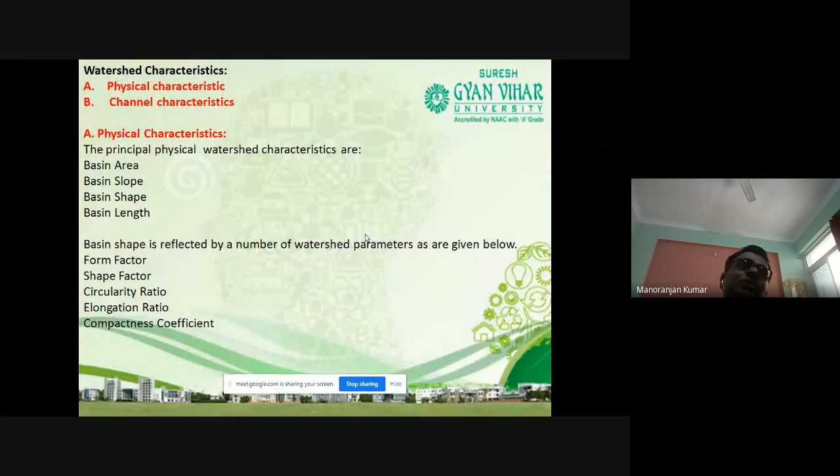Now, first we are going to discuss the physical characteristics of the watershed in detail. Physical characteristics means the area of the basin, length of the basin, slope of the basin, and shape of the basin. Watershed geomorphology refers to the physical characteristics of the watershed. Geo means earth, and morphology means the outer construction of the area. So watershed geomorphology refers to the physical characteristics of the watershed: basin area, basin length, basin slope, and basin shape.

So what is the importance of these physical characteristics? Why do we study them? These physical characteristics affect the runoff, and runoff is the most important thing in the watershed. So they affect the runoff and other hydrological processes. Let us see what those physical characteristics are. The first physical characteristic is the basin area. The watershed area is also known as the drainage area, and it is the most important watershed characteristic for hydrological analysis.

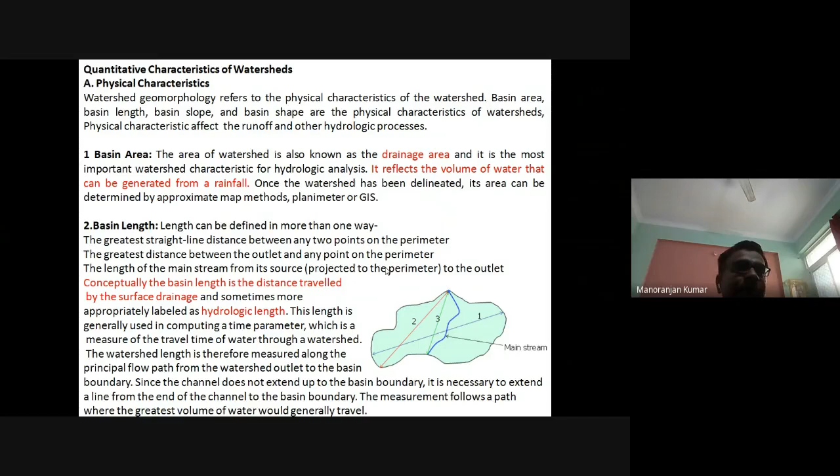Since the channel doesn't extend up to the basin boundary, it is necessary to extend a line from the end of the channel to the basin boundary. The measurement follows a path where the greatest volume of the water would generally travel. Okay. Okay, so this is the basin length.

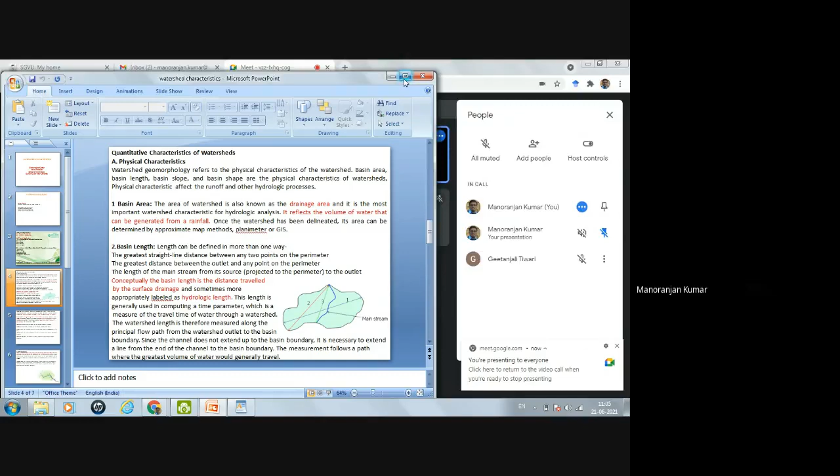Now the other physical characteristic of this watershed is basin slope. So what do you mean by basin slope? It is nothing but the elevation difference between the end points of the main flow path, and this difference is divided by the length of that basin. So you can get the basin slope. Elevation difference between 2 points divided by the length between these 2 points will give the basin slope.

So why is this basin slope important? Because basin slope will affect the momentum of runoff. It reflects the rate of change of elevation with respect to distance along the principal flow path, and it is usually calculated as the elevation difference between the end points of the main flow path divided by the length.

The fourth physical characteristic of the watershed is basin shape. There are some parameters with the help of which you can define the basin shape, because watersheds have an infinite variety of shapes, and the shape reflects the way that runoff will bunch up at the outlet.

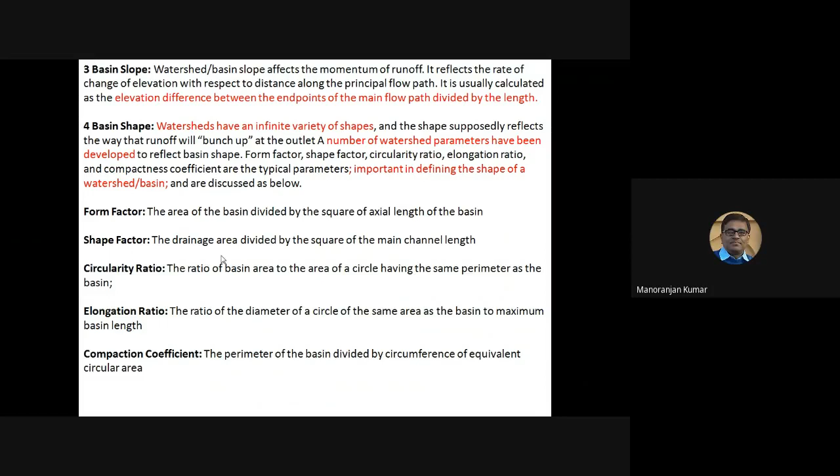The second parameter is shape factor. How can you calculate the shape factor? Shape factor is equal to drainage area of the watershed divided by the square of the main channel length. The third parameter to define the basin shape is circularity ratio. How can you calculate the circularity ratio? This is the ratio of basin area. Basin area means drainage area.

Okay, so how can you calculate the circularity ratio? You can calculate the circularity ratio by this formula: the basin area divided by the area of a circle. Which circle? The circle which has the same perimeter as that of this watershed area. Okay, so in this way you can calculate the circularity ratio.

First you have to calculate the basin area of the watershed, and after that you have to calculate the perimeter of that basin. With the help of the planimeter you can calculate the perimeter of the basin. Then you have to consider the other circle of the same perimeter, and after that, calculating the perimeter of that circle, you have to calculate the area of that circle. So with the help of this formula, circularity ratio is the basin area to the area of the circle which has the same perimeter as that of the watershed.

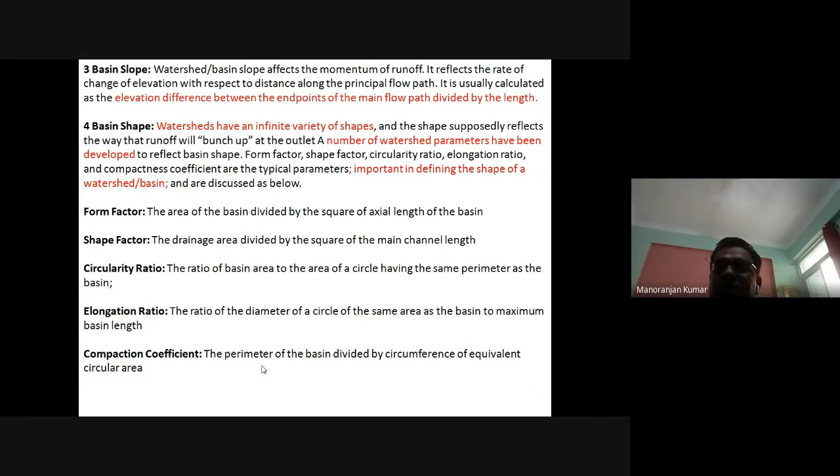Now, that was the physical characteristics of the watershed. Now we will see the channel characteristics of the watershed. Basin geomorphology plays an important role in the transition of water from the overland region to the channel, and also from a channel of one order to another order of channel. It is easily determined by contour mapping and the drainage map of the basin.

Under the channel characteristics, there are channel order, channel length, channel slope, channel profile, and drainage density. These are the most common channel characteristics. So why are these important? The channel order, channel length, channel slope, channel profile, and drainage density will help in estimating the watershed hydrological process.

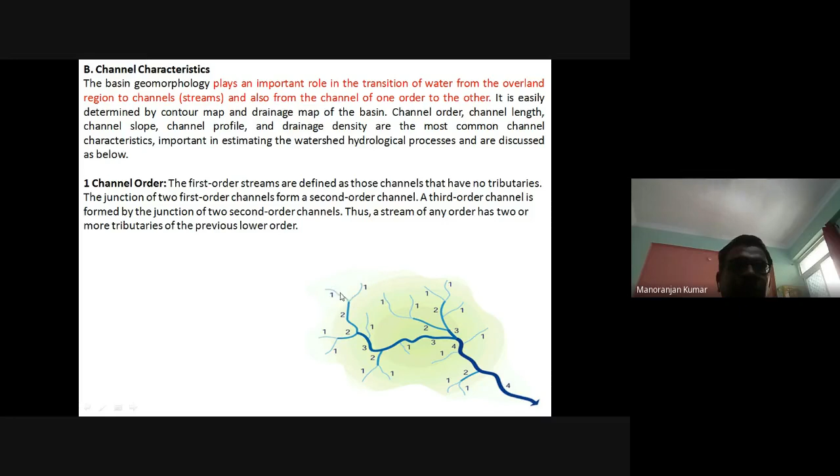Like this second order channel has two first order channel tributaries: this is one tributary and this is the other. So this is about the channel order. Now the other characteristic is the channel length. Channel length means the length of the channel of each order.

The average length of the channels of each higher order increases as a geometric sequence, like 2, 4, 8, 16. So the first order channels are the shortest of all the channels, and the length increases geometrically as the order increases.

The other characteristic of the channel is channel slope. Slope is the elevation difference between the end points of the main channel divided by the channel length. This is known as the channel slope. Now the channel profile.

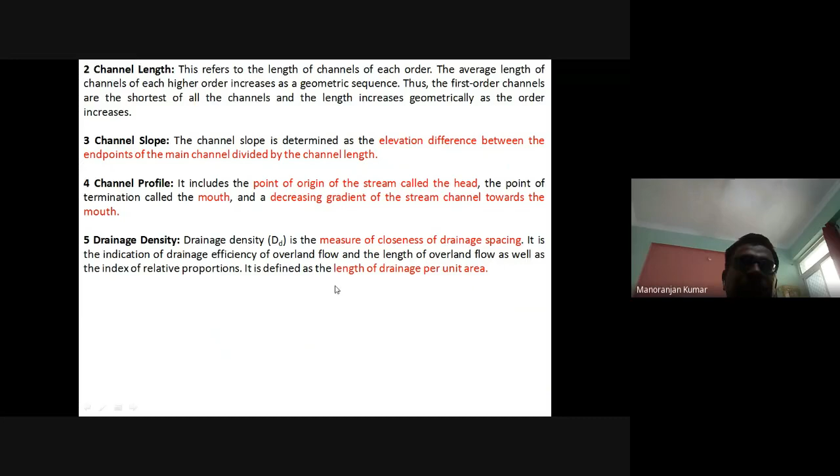Drainage density is the measure of closeness of drainage spacing, the spacing between any two drainages. It is an indication of drainage efficiency of overland flow and the length of the overland flow, as well as the index of relative proportion. Actually, drainage density is defined as the length of drainage per unit area.

So, today we have seen the watershed characteristics. In the watershed characteristics, there are two types of watershed characteristics. First is the physical characteristics, and other is the channel characteristics. In the physical characteristics, what are the different parameters? The basin area, basin slope, basin length, and basin shape.

Okay, so basin area, basin slope, basin length you can define easily, but there is some problem to define the basin shape. So for defining the basin shape, there are many parameters. With the help of that parameter, you can define the basin shape. What are those parameters? These are the parameters: form factor, shape factor, circularity ratio, elongation ratio, compactness coefficient. Okay, so all these parameters we have discussed here.

What is the form factor? What is the shape factor? What is the circularity ratio? What is the elongation ratio? What is the compactness coefficient? Okay, so here we have seen all these things. Now the second characteristics of the watershed is channel characteristics. Okay, so to define the channel characteristics, also there are some parameters like channel order, channel length, channel slope, channel profile, and drainage density.

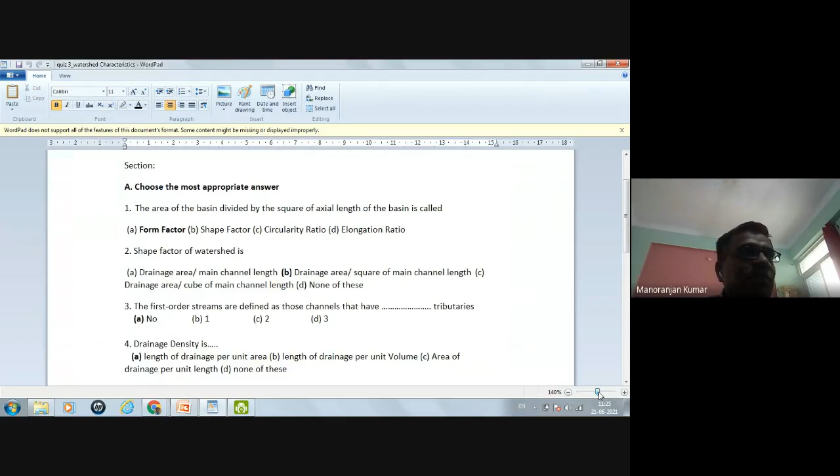Channel profile. Okay, we have seen what is the channel head, what is the channel mouth. Also, we have seen the drainage density. The length of the channel per unit area of the basin is known as the drainage density. Okay. Now, on the basis of this lecture, there is some quiz related to this topic. So let us see what are these questions. With the help of these questions, your concept will be more clear.

So first question is: the area of the basin divided by the square of axial length of the basin is called? Okay. So here this is the physical characteristics of the watershed. Under the physical characteristics of watershed, we have seen the basin shape. So to define the basin shape, there are different parameters. Out of those parameters, this is the one,

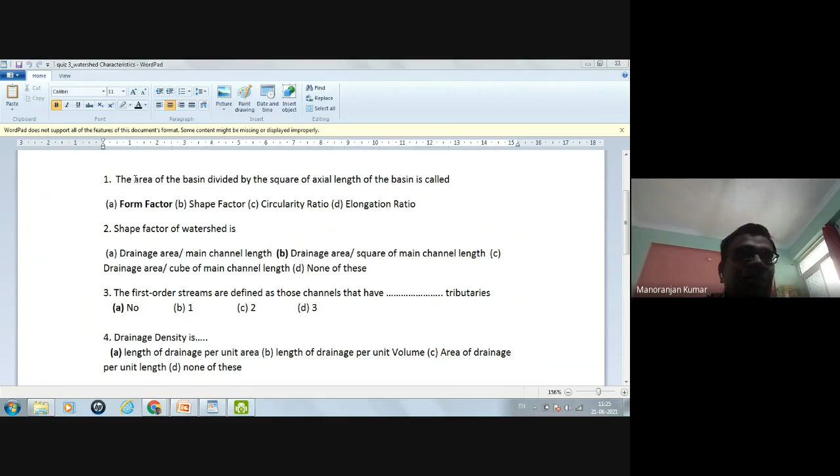the area of the basin divided by the square of the axial length of the basin is called form factor, shape factor, circularity ratio, or elongation ratio. So here form factor will be the correct answer. Okay, form factor is equal to area of the basin, area of the watershed, divided by the square of the axial length of the basin. Okay. So similarly, the second question is: the shape factor of watershed is?

What is the formula of the shape factor? The first option is drainage area divided by the main channel length. Drainage area divided by square of the main channel length. Drainage area divided by cube of the main channel length. None of these. Okay. So shape factor of watershed we have seen here. Shape factor means the drainage area divided by the square of the main channel length. This is called the shape factor. So the correct option is B.

Now in the third question, the first order streams are defined as those channels that have how many tributaries? So we have seen in the first order channel there are no tributaries, because the first order stream originates and it will mix into the second order stream or third order stream. No tributaries are there in the first order stream. So the correct answer is 0, means no tributaries. Okay.

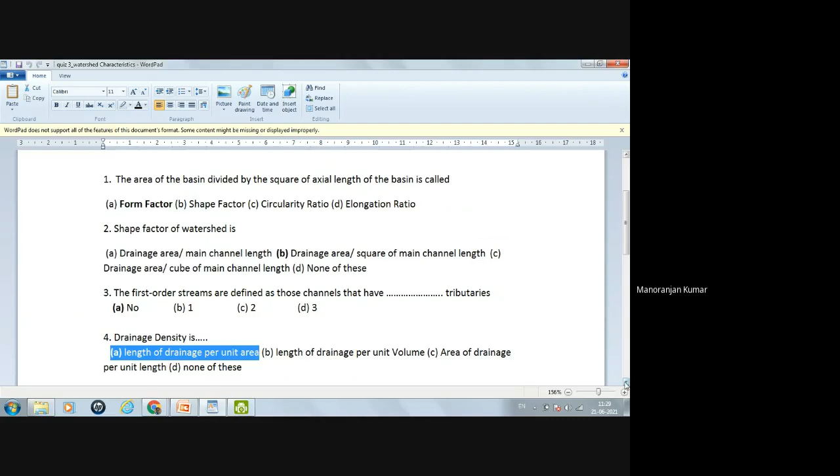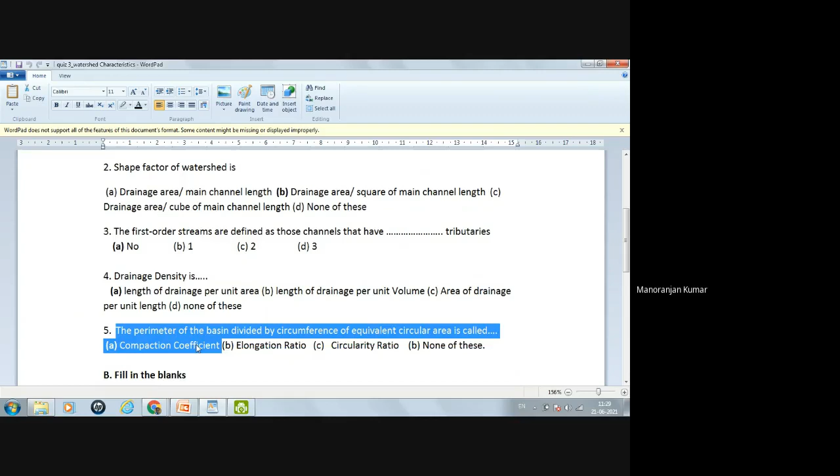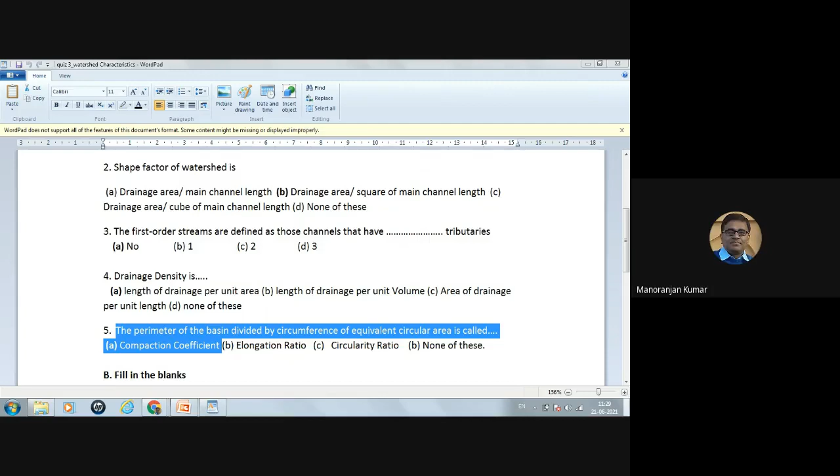Okay. Now the fifth question is, this is also related to the physical characteristics of the watershed. So this question is related to the physical characteristics of the watershed.

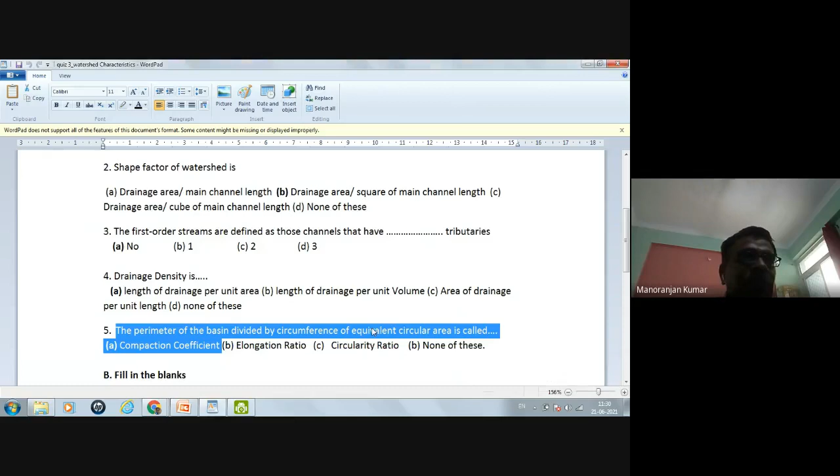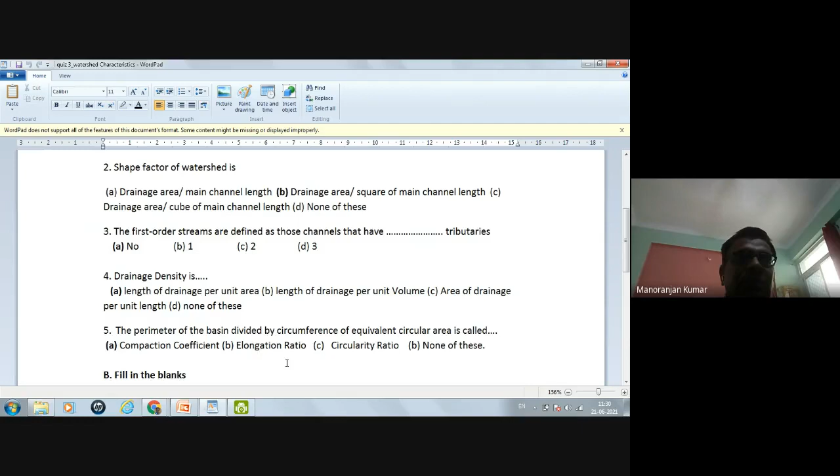The perimeter of the basin divided by the circumference of equivalent circular area is called the compactness coefficient, or elongation ratio, circularity ratio, or none of these. Okay. So what will be the correct option here? Perimeter of the basin divided by the circumference of circle. Which circle? That has the same area of the basin or watershed.

Okay. In simple language, we can write this sentence in this way: the perimeter of the basin divided by the circumference of the circle having the same area as the watershed. Okay. So what is this called? Compactness coefficient, elongation ratio, circularity ratio, or none of these. So the correct option is the compactness coefficient. Okay.

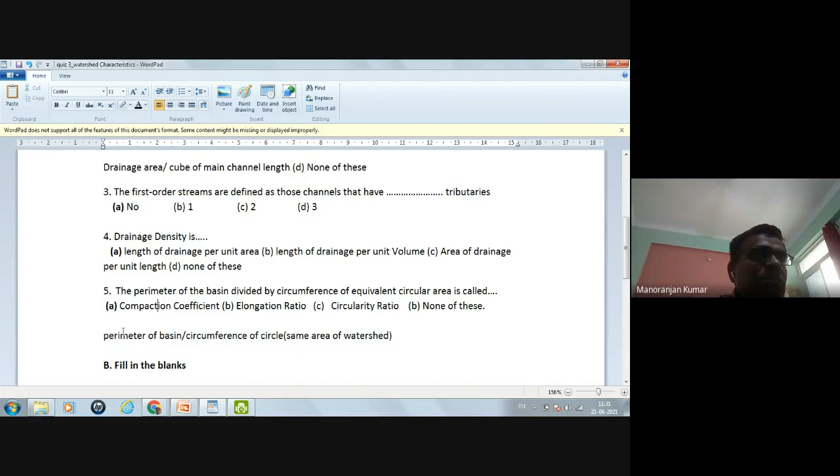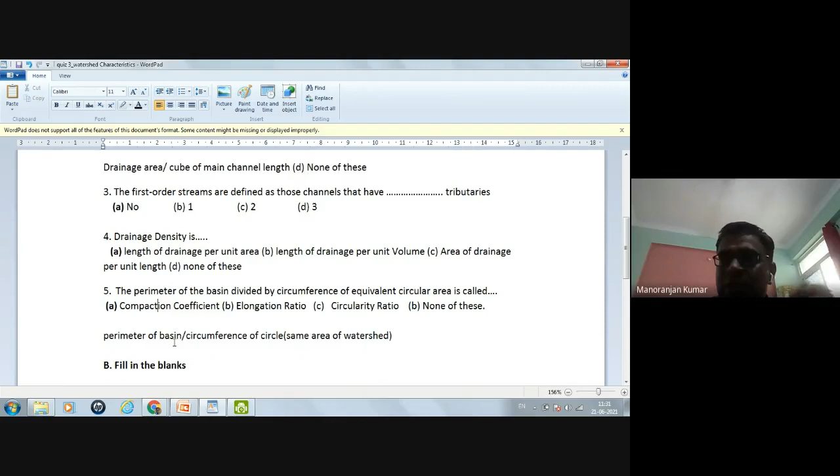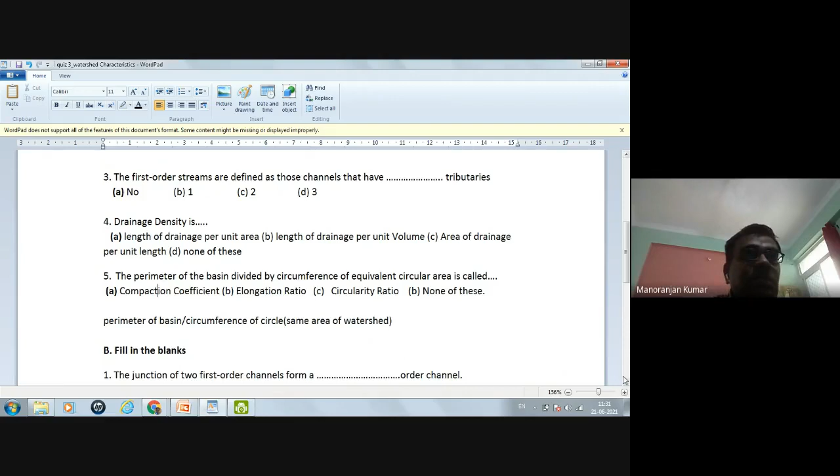Compactness coefficient means the perimeter of the basin divided by the circumference of the circle that has the same area as that of the watershed. Okay. So this is the compactness coefficient. Now the other questions, let us see. Yes, the first is: the junction of two first order channels forms a dash order channel. What will be the correct answer?

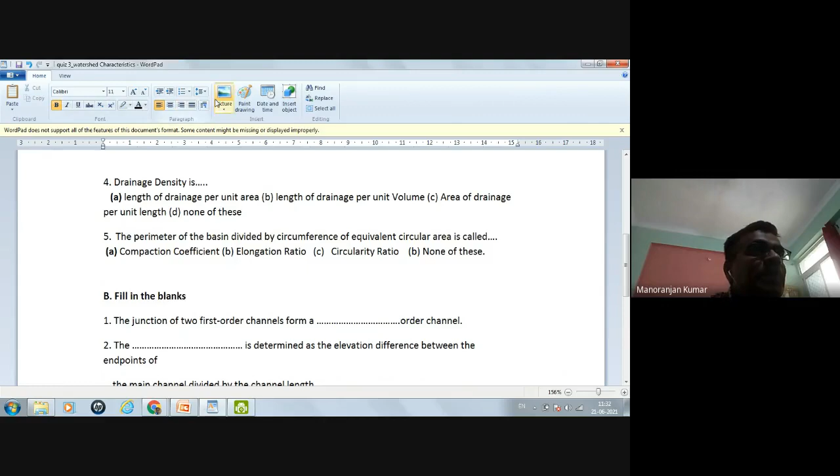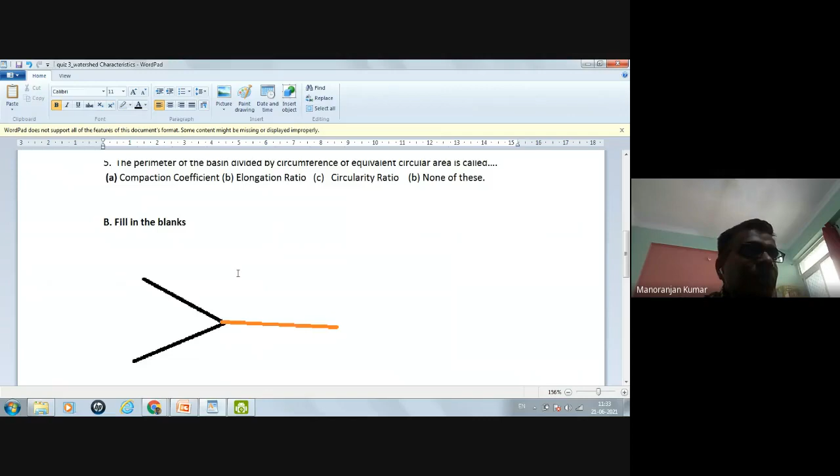Suppose there is a first order channel from this side. From this side also the other first order channel is coming like this. Okay, so this is the first order channel, and this is the second order channel formed at the junction of these two. So this orange channel is of how many order? This is the question. Okay, so this is the second order channel. The junction of two first order channels forms a second order channel.

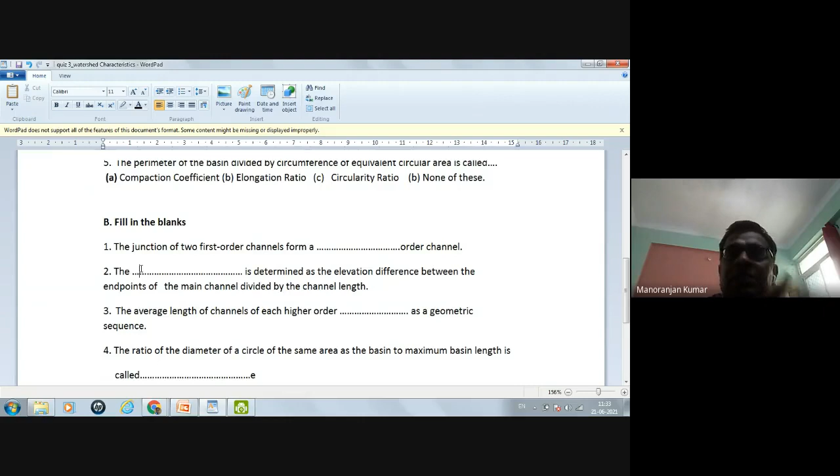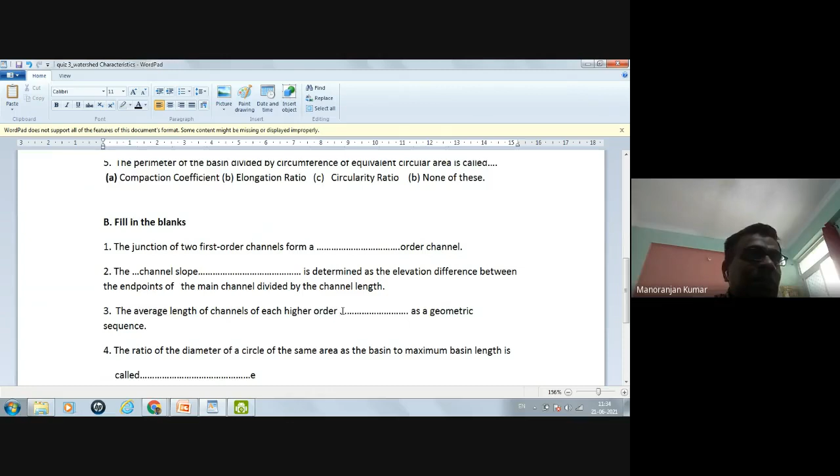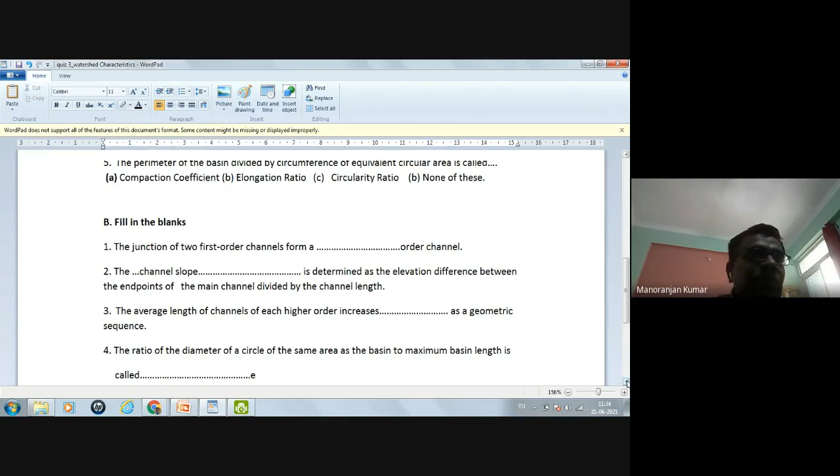The third question: the average length of channels of each higher order dash as a geometric sequence. We have seen this sentence in channel characteristics of the watershed, where the average length of the channel of each higher order increases as a geometric sequence, like 2, 4, 8, likewise. Okay, so here the average length of the channel of each higher order increases as a geometric sequence.

Now the fourth question: the ratio of the diameter of the circle of the same area as the basin to the maximum basin length is called. In simple language, it is asking the ratio of the diameter of the circle that has the same area as the watershed, divided by the maximum basin length.

Okay, in simple language we can write: diameter of the circle having the same area as the watershed divided by the maximum basin length. This is called the elongation ratio of the watershed. Okay, this is the elongation ratio of the watershed.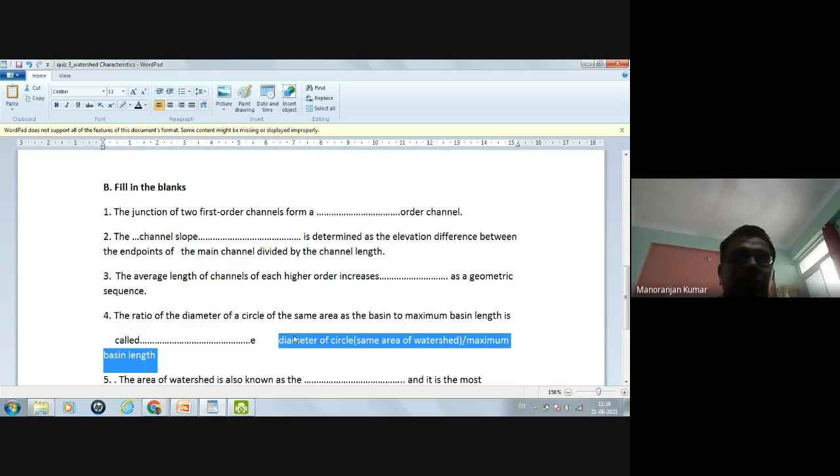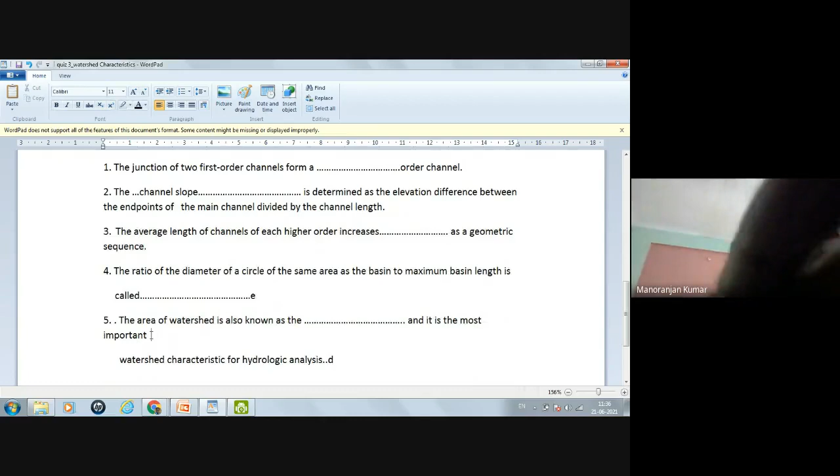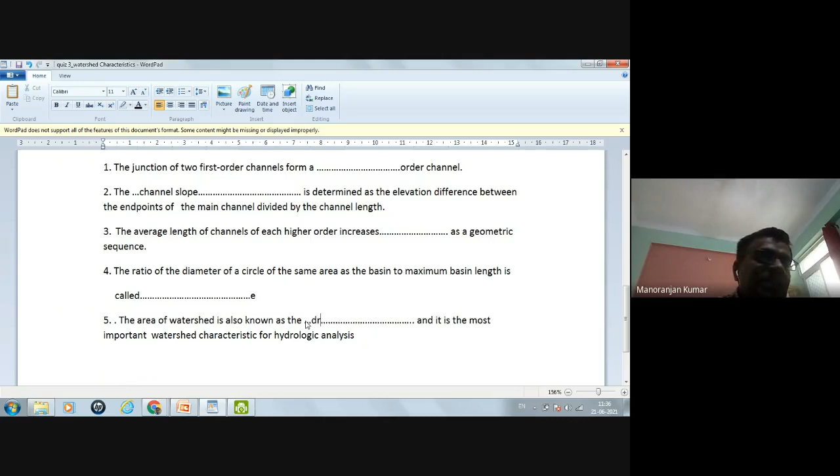Now the fifth question: the area of the watershed is also known as dash, and it is the most important watershed characteristic for hydrological analysis. The correct answer is drainage area. The area of the watershed is also known as the drainage area, and it is the most important watershed characteristic for hydrological analysis. Okay, so these are the questions related to this topic.